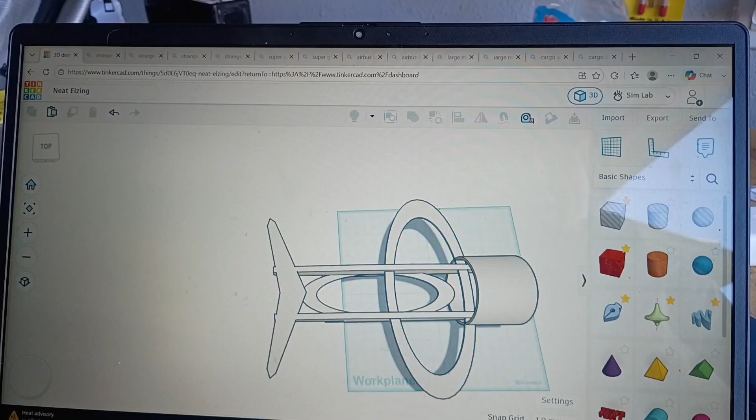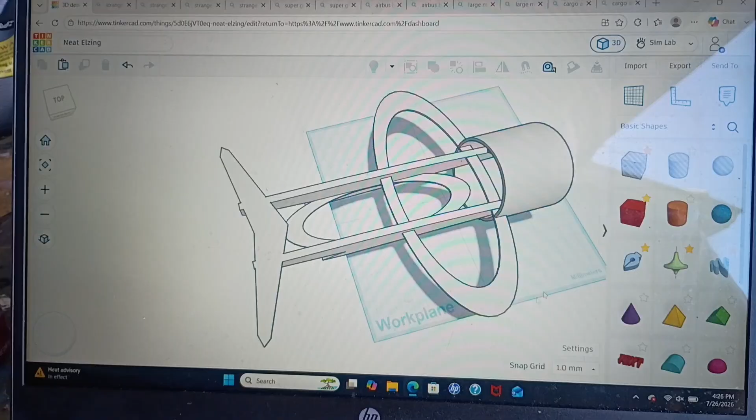A while back I created an aircraft called the IFO, the Identified Flying Object. So here we are again, getting back at it, and we're going to make another one. The design is not conventional, as we can see. We have a disc circle wing thing, I'd call it, mixed with some other glorious design features, such as this disc, another circular wing, and a forward swept canard setup.

The aircraft is actually going to be single engine. I'm going to put an extra fuselage right in between this zone right here and just have one motor. But if that still fails and I don't like it, I'm going to grab the two motors off of the OV-10 Bronco and stick them on the two pylons, which we see here.

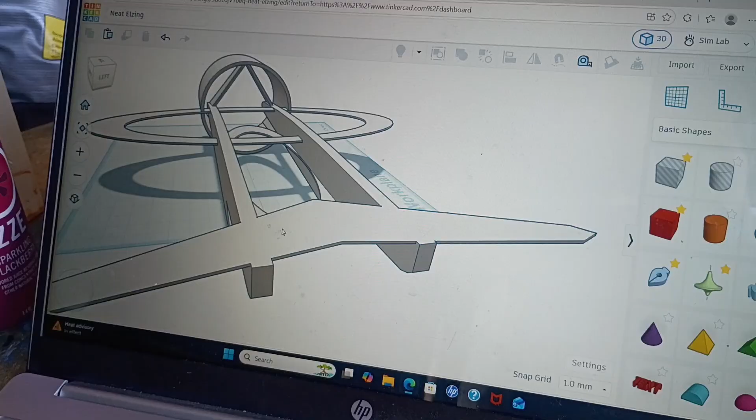So today I'm going to give you guys the breakdown on how I'm going to build this. For the dimensions, as of right now, I'm thinking maybe 60 to 80 inches long. I'm going to go 80 inches long, with... I don't know, maybe a 60 inch wingspan?

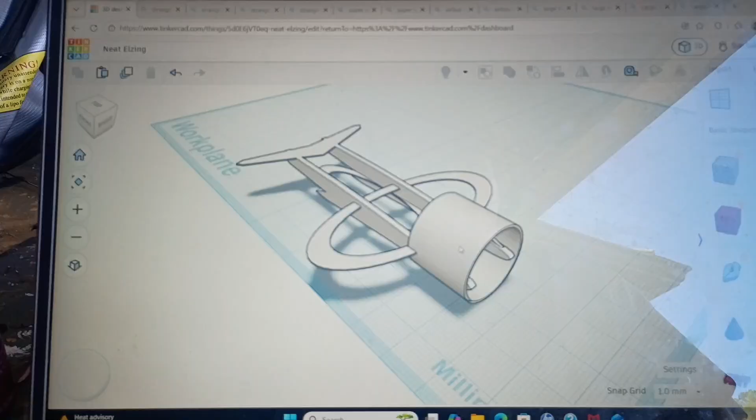The first step to making this absolutely cursed plane is going to be tracing out the side of the fuselage. So you can see there's your simple intake system. It's going to have a little landing gear trace off right here, because towards the back is where that big 20-inch circle is going to be, right about here. That's going to boost this entire thing all the way up to 80 inches long, which is an average Evans scale - I wouldn't even call it Evans scale, it's micro Evans scale.

I'm going to mirror this onto the other part of the sheet, and then repeat the process again on another two sheets. Then I'll show you guys how I can connect all of it to make those pylons, which we see on the actual main plane's design.

Which is rather simple if you ask me. It's actually only going to be about 2 inch wide, 2 or 3 inch wide - I don't actually know just yet. And then I'll show you guys how to make the wing and the rest from there.

The process that takes the longest is actually making the two fuselages, which I'm going to grind out real quick. And to my friend Lucas, who's also on this YouTube channel, who's probably watching this video right now thinking, Evan, what are you doing? Just shut up.

And boom, just like that, we got 8 foam board copies of these. I know this doesn't look right, but you guys get the gist.

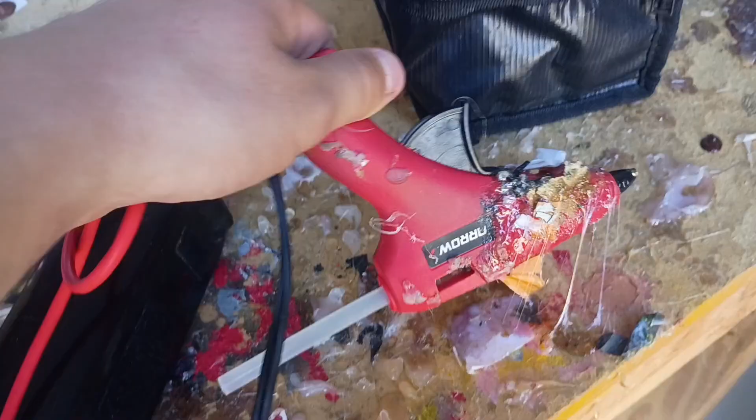Alright, let's move to the next part of making the two fuselages. So I've now created some 3-inch strips that I'm going to professionally use to attach to these, and I'm just going to hot glue it all together. I'll show you guys what it looks like once I glue them all together, and we'll go from there.

And just like that, these two incredibly strange shaped fuselages are almost finished. I just have to glue and seal them, make sure everything lines up.

As we can see here, I added a little tiny intake zone for the airflow inside of the wing and aircraft to go through, because it's going to have two motors, one at the top and one more here. The airflow is going to flow down into this little intake and get spit out. But there's still some extra airflow, so that goes over the top, and if there's a bit more or less air, it can go out the back. That's just to ensure this plane doesn't try to rip itself apart midair.

I'm going to seal these up, and then I'll show how I make what I call the crack airfoil wing. And just like that, these two fuselages are fully designed.

Easy to do. The aircraft's wing is going to span out here with that forward swept, and then it's going to have that ring wing go right about there, and then the big giant cylinder wing in the back, which will have a small circular wing inside. It won't have any crack airfoil. The other two airfoils are going to be on the outer wing in the back and the front canard wing as well, so it'll technically have 4 wings. That disc in the back, that cylinder, honestly I have no clue what it's going to do, I just thought the design looked cool.

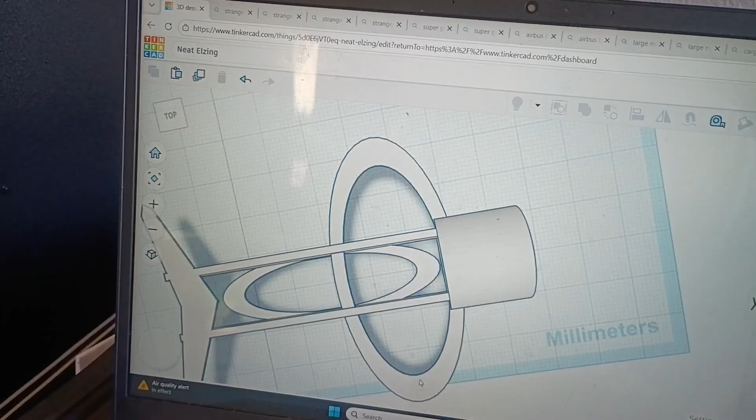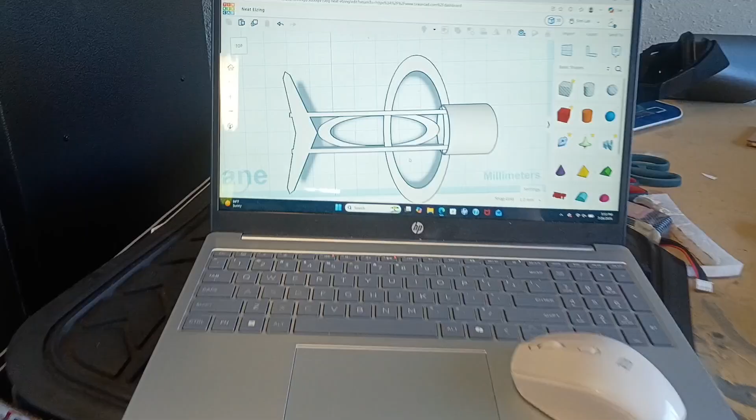And then we're going to have to add that little crossbar, and then this wing on the end — I'm not going to make it circular, I'm actually just going to make it probably triangular.

Just 2 angular crack airfoil wings connected to make just a little triangle. So this isn't pure sketch-off detail, this is literally just a guesstimation. But I just want to make sure I get this in the back.

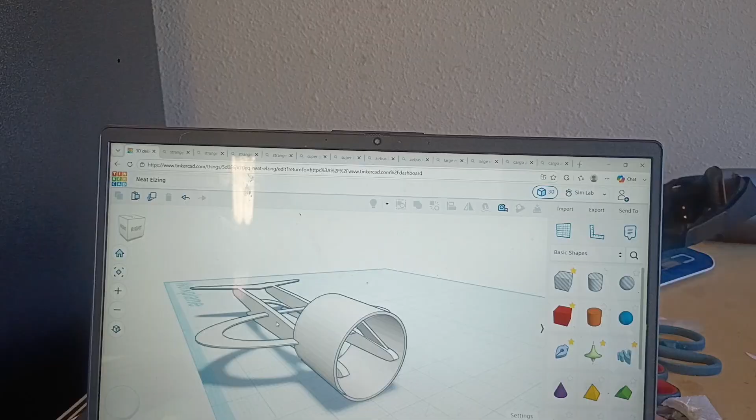Now on here you can see I had vertical buttresses, kind of like I call them. That's kind of what I'm gonna do again, but I'm just gonna have a fishtail rudder shoot up on both sides. Then I'm just going to have the circle attached there, and that circle is going to be 20-inch long. So that's going to boost us to that 80-inch limit that I wanted, and make this thing even larger. Because why not? I'll keep you guys updated.

I'll slap down that circle. I don't really know how I'm going to do the circle thing, it's going to be a bunch of guesstimation eyeballing. So I just know that it has to be 16-inch wide, and that's about it. I don't really know what to do from there, so I'll figure that out.

So here we are, we're back. I have created the outer wings. I couldn't really make them circular, which is fine, I don't really care as long as it's a wing. So that's what it kind of looks like as of right now. It's pretty basic, pretty easy, pretty simple. I say that as this thing looks not normal at all.

So now I have to make the circular wing on the tail section after I do a couple little glide tests. Here by the elevator, I'm thinking about trimming this and cutting it flat, just like a giant bar instead, so that I can have a normal elevator, and then just ailerons, I'm supposing. I actually have no clue, we're gonna figure that out later. That's a later problem. But now it's time for that cylinder in the back.

So I've bent the top wing half right now, the top circle. I ended up putting it inside the fuselage to keep it 60 inch. So instead of being 80 inch long, it's 60 inch, which is fine. So as of right now, it's a 60 inch wingspan, 60 inch length. Yeah, this thing is a beast.

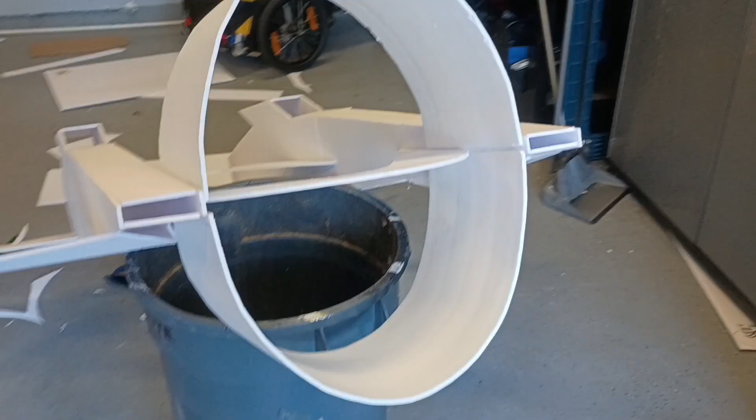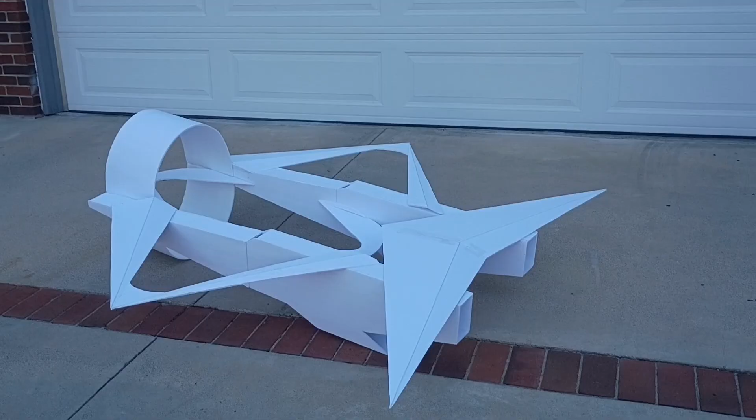Just like that, the oval wing has been completed. Well, let's flip her over and see what she looks like. Well, you may not understand what you're looking at, which is good, because that's the entire point of the design. So there we go, that's what we got so far.

I'll make a future video on how to get the electronics in this sucker. The plan is she's actually going to be VTOL, meaning she's going to sit up vertically on that circle wing. So she's going to sit up straight like this, with the motors pointed up in the air, and we're going to just full throttle and send it into the air, and that's how we're going to actually take off with her. Let me give you a walk around at this view.